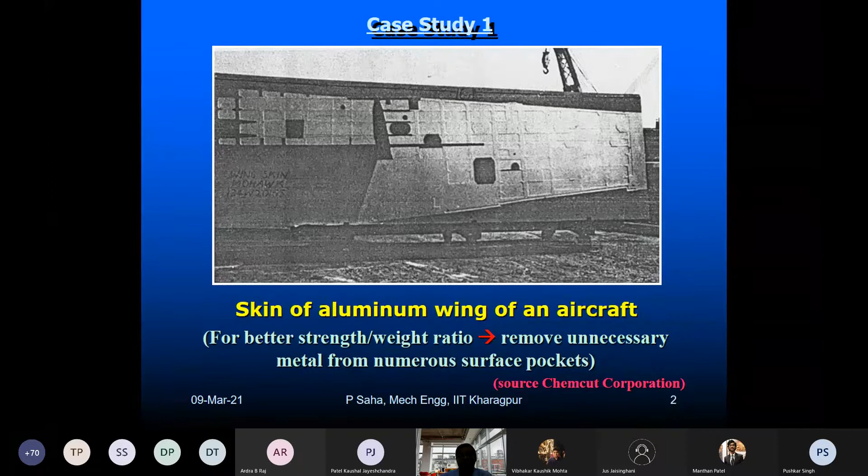And the first case is a very big, large job. You can think of a big aircraft wing, each one spanning up to several meters. Whereas in the second case, I'm focusing upon a much smaller object, and it is a thin object.

What is that material? This is basically an encoder disc. What is an encoder? It is actually fitted with a small motor, maybe a stepper motor or some other motor. So when the DC motor rotates, probably through a light sensing device, it can tell by how much angle it rotates, and the total number of times it has rotated. So if you have a counter, you can do those kinds of things.

So this encoder disc is very thin, only 25 micron thickness, and it is made of an alloy of copper and beryllium, not exactly copper. Copper is much more malleable, so this alloy gives slightly more stiffness to the copper.

Now on this encoder disk, what I need to do is make some small rectangular slits all along its periphery. On the circumference you see there are such slits, and these slits are of equal dimension, every slit, and they are equidistant with respect to each other. So if there are 200 such slits on the circumference, roughly every slit is around 1.8 degrees apart, 360 divided by 200.

The question is, how to machine and make such precise slits at regular intervals on such a thin disk? Again, machining is not even an option, and conventional blanking process will probably also be ruled out because of the size of the features and such close proximity between them. So I have to think of some other methods. These are just some examples, but let us see what could be the solution.

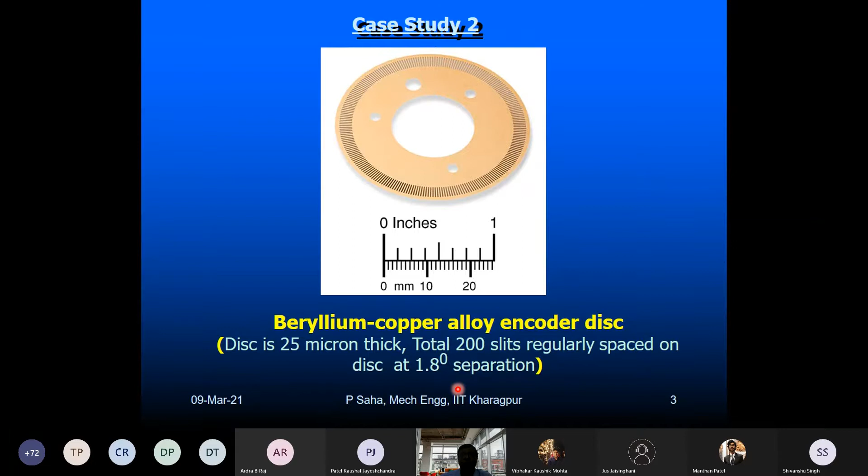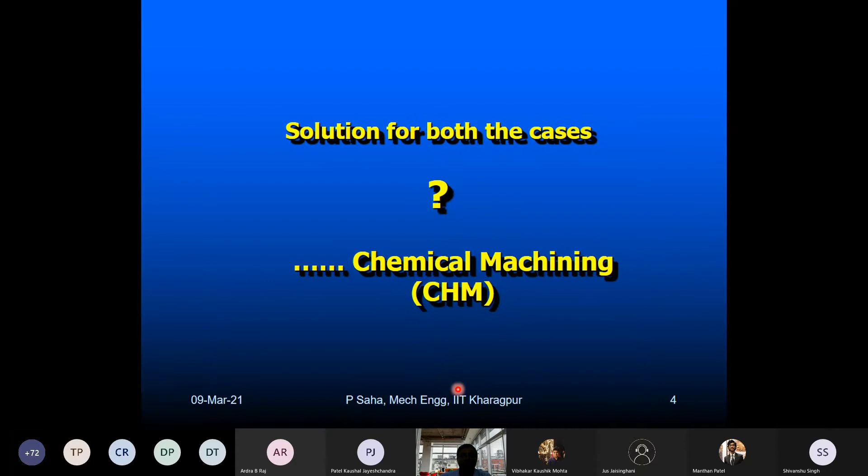The solution for both cases could be, I'm going to emphasize, our topic today is chemical machining. So chemical machining, we can have... just a minute.

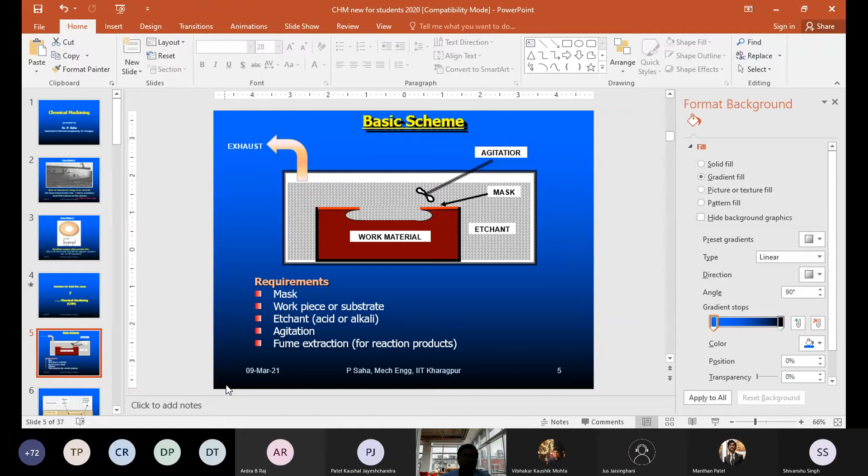This is the basic scheme of a chemical machining, but as per actual applications and requirements, this scheme may be different. It may not be exactly like this, but functionality-wise, the way machining happens remains the same. So what we have shown you is a container.

Which is filled up with some etchant. What is an etchant? Etchant is a reactive chemical. It could be an acid, an alkali, or some other salt, which has some corrosive properties.

So here we have submerged this work material, and you see out of this work material, some portions—initially it was a complete block—I want to machine out some portions. So this has been machined out with time. After some time you have shown it.

So what is responsible for the machining? It is the chemical reactions between the etchant and the work material. So obviously when the chemical reaction takes place, there will be some reaction products.

These reaction products could be either solid products, or sometimes soluble products, or sometimes gaseous products. But what is important to know is that with time at the interface, as the reaction goes, the concentration of the original etchant will keep on changing, so that locally available on the surface, the etchant may not be the same.

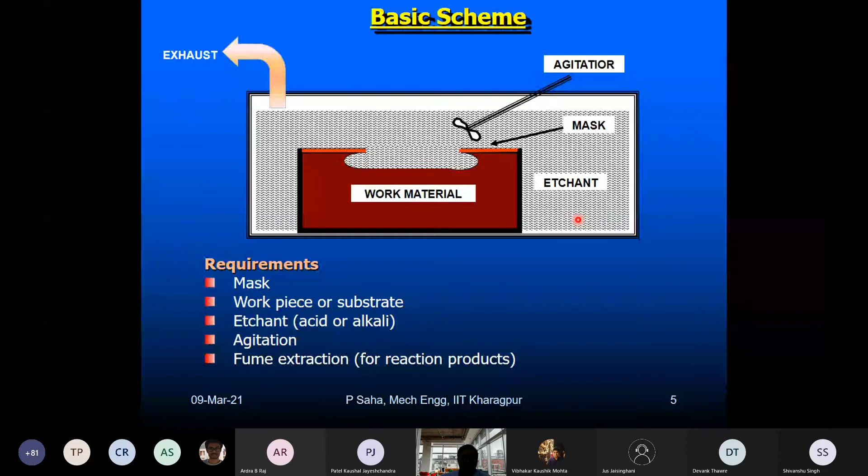So let us move forward. So here, what you see, the bottom is your job. So this light pink shade is the job.

And this whitish thing is basically the open atmosphere, or this is etchant. And the job is dipped under this etchant. And here, my reaction will happen in a very thin layer, which we can consider as a boundary layer.

A thin layer of this material. So within this, actually what will happen? From the etchant solution, the reagent will diffuse into the work surface.

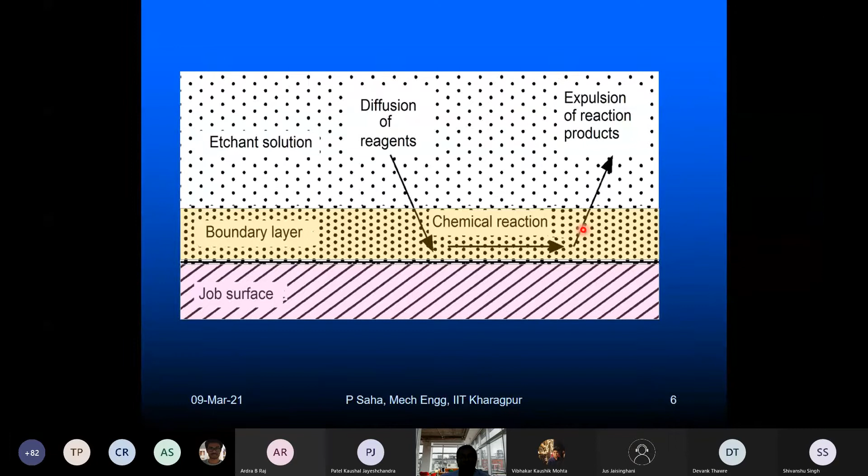They would react through the chemical reactions, and the reaction product will be generated, and they are desired to be expelled out from the workpiece. Otherwise, if the local concentration of the reaction products remains high, the reaction rate will go down. So we have to ensure their expulsion from the job and replace that with a fresh reagent.

Now I'm talking about the mask. When you cover the entire workpiece surface with mask, and if it strongly adheres to the surface and remains inert with the etchant, what will happen? Nothing will happen when you dip.

But we want to machine at specific areas of the job. So those portions we cut the mask, we strip the mask, so that etchant can come and react with these areas, so that these portions will be machined over time, and such depth will be attained.

But with time another thing may also happen. You see on the side we are getting a slightly tapered cut. Why? Because as more depth is entered, the etchant can react from the side. So even the extended portion of the mask, below the mask, some portion is always machined by side machining. So you don't get an exactly straight cut - some undercut will be there. This portion is called undercut.

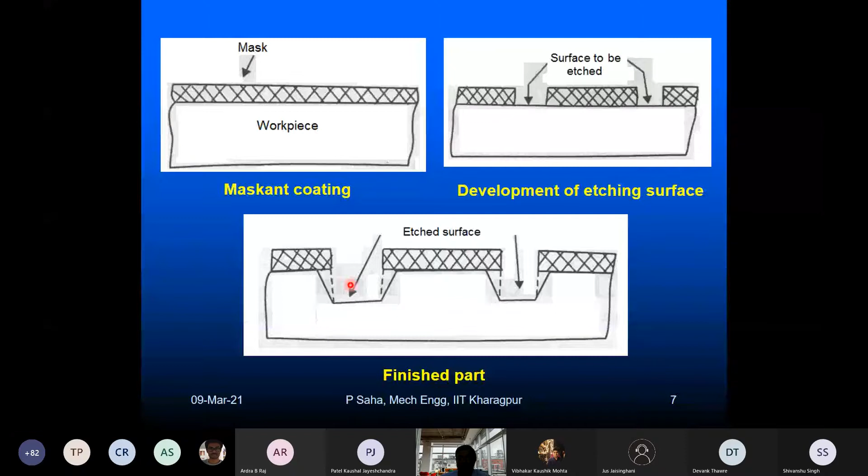Classification wise, chemical machining broadly can be classified into two things. One is called chemical milling operations, like aircraft tubing. Through chemical milling we are doing weight reduction, blind detailing - it is not a through machining process. Whereas for chemical blanking process, it is a through process, and some features we can go for through detailing - meaning both sides are open, so light can pierce through once you machine it.

Sometimes we also have what's known as chemical engraving. This is also a kind of milling process, but here the detailing is blind, only up to a very limited depth. I'll show you some figures later, giving examples and applications of the chemical engraving process.

And the last one, very much used in industry, particularly for various types of small components - electronic circuits, printed circuit boards and all - photochemical machining is also used. I'll try to discuss that as well.

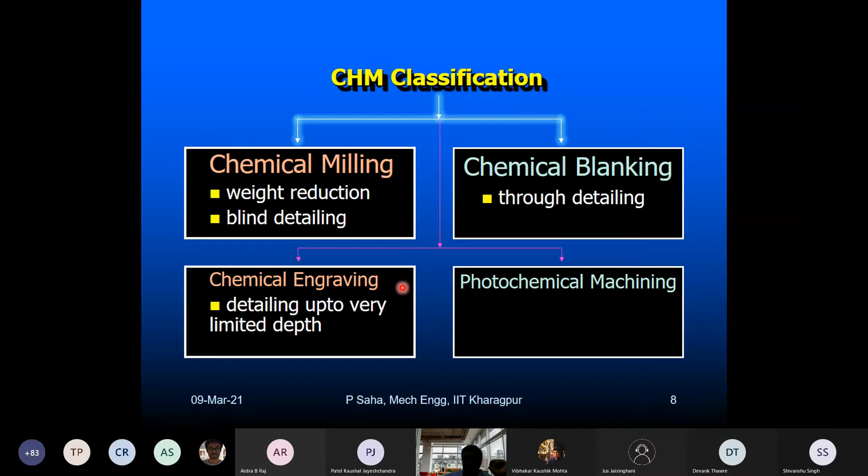So from these classifications, let us see - one of the primary requirements is the mask. I have to cover up with mask the portions which we do not want to machine. Depending upon the size of the job, the accuracy required, and the number of jobs to be produced - the batch size - there are different types of masks, and how quickly we can generate them.

One of them is a cut and peel type mask. This kind of mask is typically applied on relatively bigger size metallic jobs, using very thin sheets of rubber, similar to surgical gloves, made of vinyl rubber or neoprene rubber.

The mask material is first applied on the entire surface of the substrate. The substrate is much bigger, like think of the aircraft wing - such kind of cut and peel type will be applied there. This can be applied by brush, by flow, by dipping and taking out from the rubber solution, or by spraying. Typically the thickness will be between 0.03 to 0.13 millimeter - sub-millimeter.

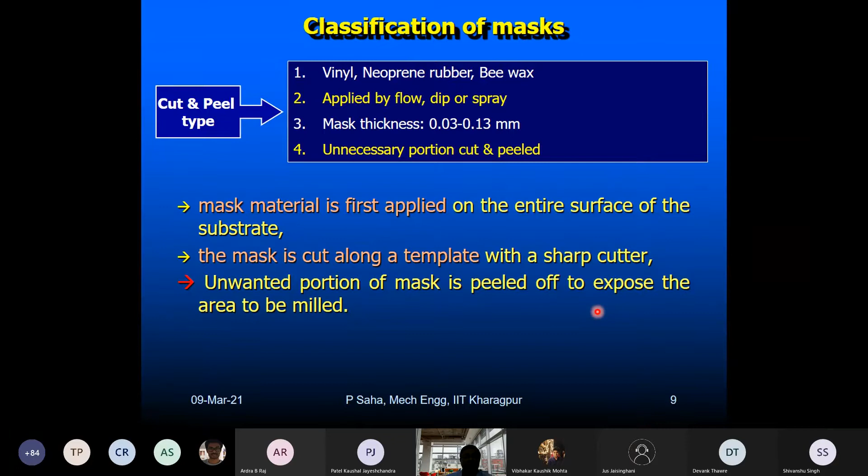Now the second type of mask is called screen print. Screen print is very much used in the printing industries, and we also use it for chemical machining. Here we have to use a mesh - a kind of net-like surface, like a silk cloth which is made of very fine silk.

Okay, but if you look microscopically, they are made of very fine fibers, fabrics, and there are a lot of perforations there. If you pour water through the silk, slowly the liquid will percolate down to the bottom, and if anything is there, it will be transferred onto this liquid.

We can also have a very fine mesh of stainless steel wires, which have much higher longevity. This will have a stencil placed upon the material upon which the material will be machined. With a figure I will try to explain: on the bottom you have a net, over which we have some kind of a stencil. Stencil means a solid sheet having some selective opening describing the image to be transferred, so a liquid can be transferred down onto the net. So this is what is called the stencil.

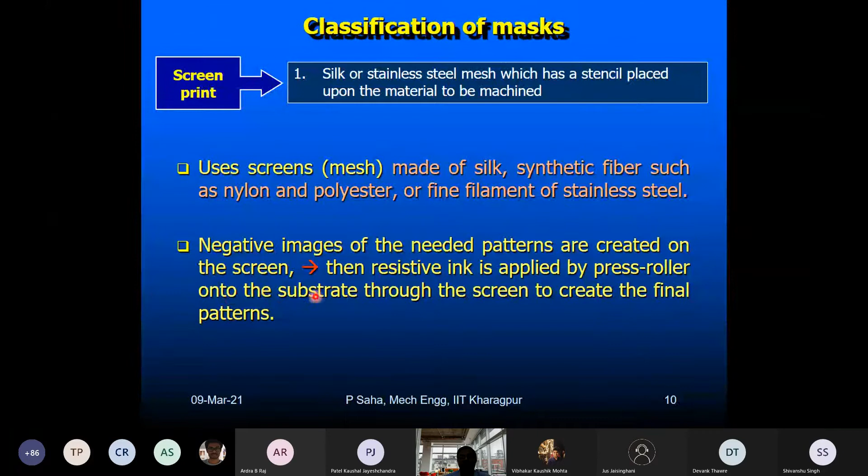So through the projection systems, the light image is made to fall on the screen, and by that time we have applied a resistive ink, by a squeegee or a pressed roller, onto the substrate, and through the screen we create the final patterns.

How is it done? Let us see like this. All of you might have seen an overhead projector - before PowerPoint, this overhead projector used to be used very much. For that, we have a transparent polymeric sheet known as an overhead projection sheet.

This sheet is transparent, thin, same A4 size, which can go through a laser printer, and something can be printed through the printer onto this transparent sheet. This can easily be made of a film also. Suppose we have some image in mind which has to be printed on this chart - so the film positive we create on the film.

Now below a projector this will be placed, and this image will be used to expose and harden the light sensitive emulsion. What is this light sensitive emulsion?

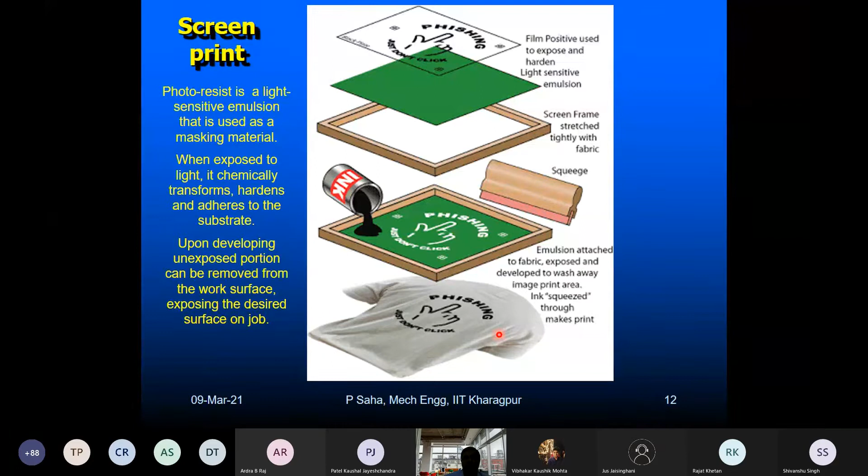The third type we have is the photoresist type. Photoresist is what I explained in the last slide. This will mostly be synthetic photoresist, and it will be applied by...

...a coating plate rotating at very high RPM, several thousand RPM. This device is known as a spin coater. On the spin coater, we hold the object through a vacuum gripping system. Here, through photographic projection techniques, we create the photoresist mask quite similar to the earlier one, and the mask thickness for this application is extremely thin, only a few microns, 2-3 microns.

It is not used for parts more than 1.25 millimeters thick and 1.5 meters long, and it can handle highly corrosive reagents. So the photoresist mask can create very fine, accurate, closely spaced features, reproduced in a very accurate manner. This thin resist pattern provides small chemical resistance to strong alkali and acid agents, so it is mostly used for surface applications with very small depth.

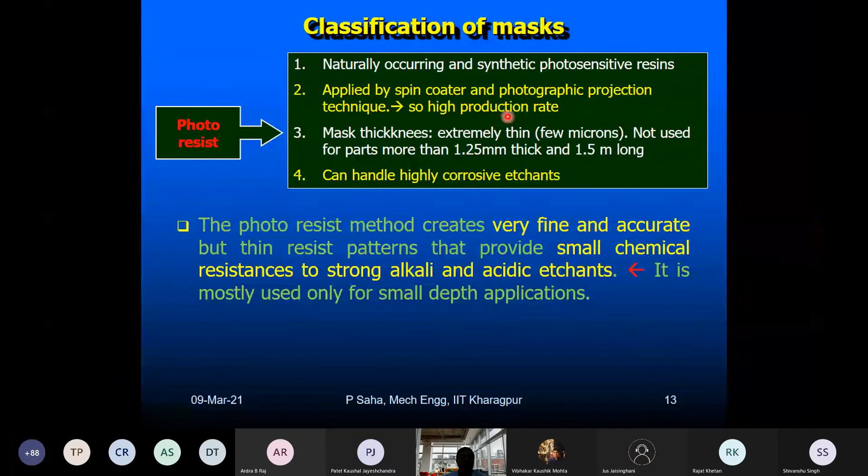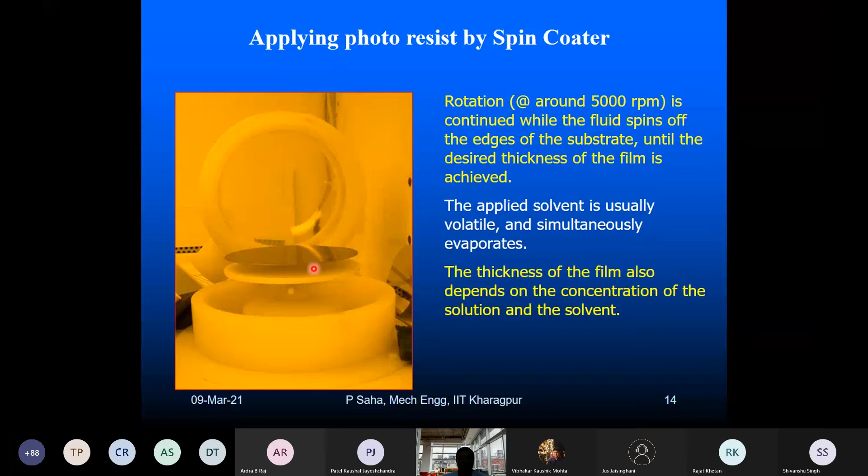Now this has to be exposed with some kind of photographic projection similar to the earlier method, so that any image, a positive image, can be transferred, and with the UV light projection systems the mask can be created by the chemical conversion of the photoresist at select locations.

I'll come to this later when I talk about the photochemical machining techniques, in more detail. Now, what will be the selection criteria of the mask, from common sense?

One thing is very sure: the chemical resistance of the mask is a primary issue, because the mask should be chemically inert to the etchant. If the mask also reacts, probably that will not serve any purpose. So deeper etching will be possible with a thicker mask.

Then part configurations - because when you talk of a spin coating thing, spin coating will probably be only for a flat job. But suppose we have some kind of a seesaw job, or some undulations, or some curved surfaces - there probably we cannot use a photoresist coating.

Then, in how many numbers do you want to produce the parts? So masking - because if you have to make large numbers, the mask making process also correspondingly has to be done at a much faster rate.

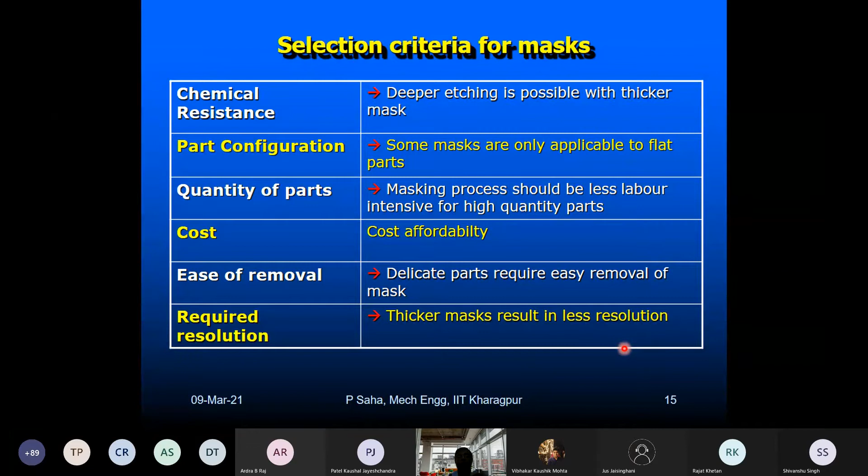And lastly, the required resolution - because the thicker the mask, from the opening down to the bottom up to a certain depth, the resolution will be lost. But whenever the mask is very thin, like the photoresist mask, you can have very fine features, very closely spaced features, because you can maintain resolution very high, and you are only going for a typically very surface level thing.

So application-wise, as I said, cut and peel type will be used for big structural parts, like milling of aircraft components, milling or blind machining of missiles, space components, and like that.

What about screen print? Screen print will be for mass production, because cut and peel type is for low volume production, as it requires a not-so-automated way.

Maybe you can use a CNC. If you have a CAD design, the moment you apply a mask, you can incorporate a CNC machine with a cutter. It can cut the path of the masking portions, and then manually you can peel them off. This is one way, but it is time consuming. Whereas screen printing is much faster, but it is less accurate compared to the photoresist technique.

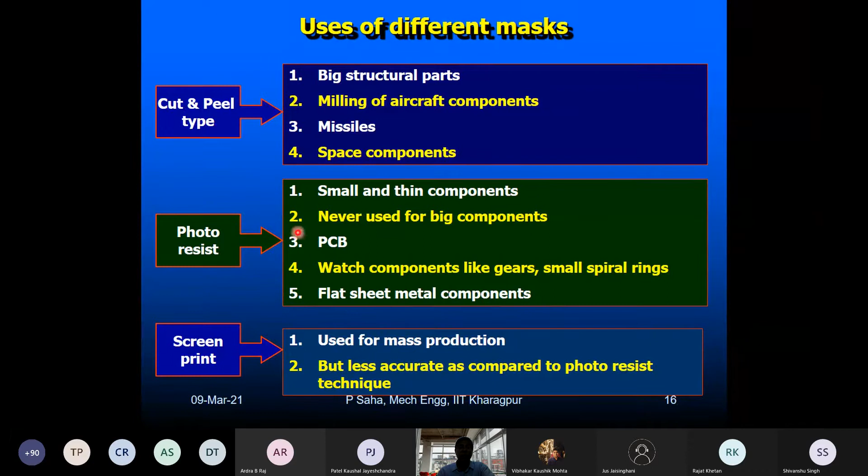So what about photoresist techniques? It will be used for small, thin components, but never for big components. Printed circuit boards can use it. Watch components, like small analog watch gears and micro gears, small spiral rings, these are manufactured by photochemical machining using photoresist. Flat sheet metal components can also be made using photoresist, typically for small jobs.

Now coming to the concept of undercut and etch factor. When you achieve a certain depth, say this red color is my depth of machining, and I want to machine up to a certain depth, this is the depth of cut. But because of side machining, as you penetrate with time, on the top portions there will be more machining, and down to the bottom the machining will be less, because the bottom portion is exposed for less time to the chemical. So we get a tapered surface.

So this is known as undercut. The mask is up to this point, but actual side machining on the top is up to this point - this is what is called undercut. And the etch factor is the ratio of the undercut divided by the depth of cut.

For different etchants, their characteristics are different. We can have a whole lot of etchants starting from ferric chloride, chromic acid, ferric nitrate, hydrofluoric acid, nitric acid, and so on. Sometimes we also use mixed acids, like HCl and HNO3 together. It all depends on your application and which metal you are working on.

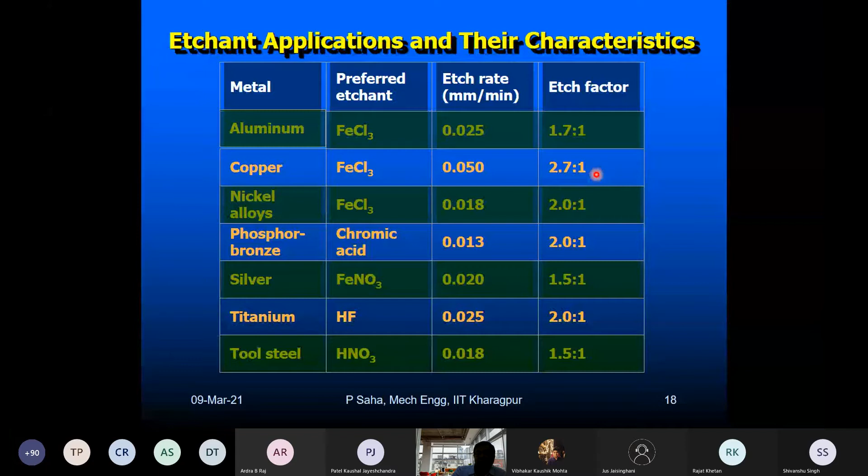So depending upon the etch factor, if you know the depth of etching, you can predict this extra dimension coming into the final machining, and restrict it by restricting the mask opening. Suppose the intended dimension is 10 millimeter, so you don't make the mask opening 10 millimeter already - you make the opening slightly less, because you know some additional dimension will be achieved through the side machining process.

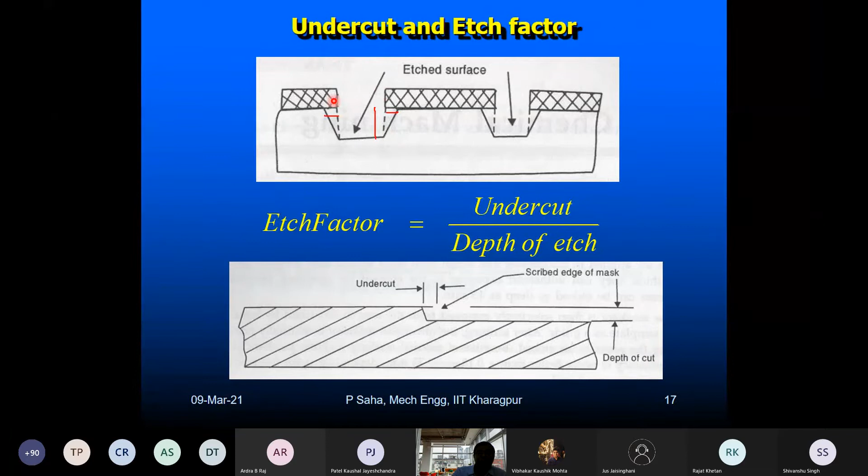So this undercut has to be taken care of during the mask opening process, so that once we achieve the depth, the undercut is known, and the corresponding mask opening dimension can be decided. So etchant selection will depend on surface finish, removal rate, material type, etch depth, type of resist, cost, and so many other things.

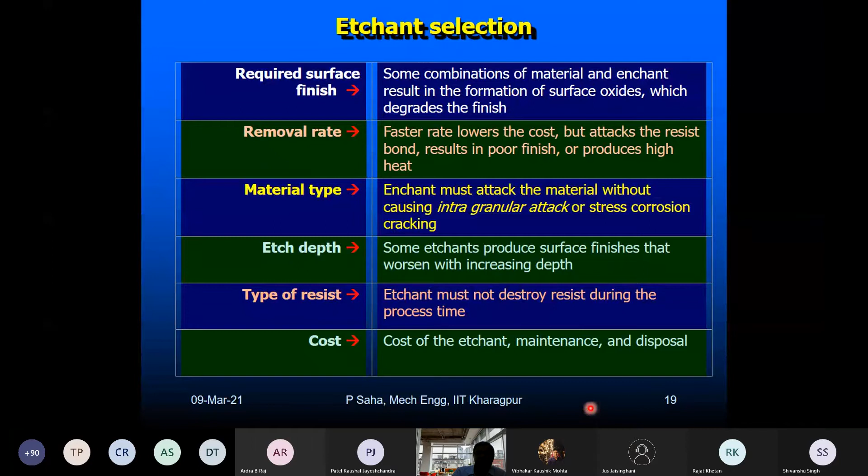Now, because of the undercut, if we try to attack the job from one side, what will happen? There will be undercut, there will be side machining, and we are going to get a tapered surface like this. But in order to avoid this, we can opt for double-sided etching.

This requires little prior knowledge of what the etch factor is, how the etchant is going to react, how much the slope will be, and so on. But whatever the case, sidewise straightness or zero taper can eventually be achieved.

If you sequentially go like this, you see how it is achieved. Say initially we have started like this. Now we have a double-sided mask, on the top and on the bottom, both submerged or exposed to the chemical. So the reaction happens at the same rate at both surfaces. Initially it goes vertically down, and gradually it starts attacking more and more from the side.

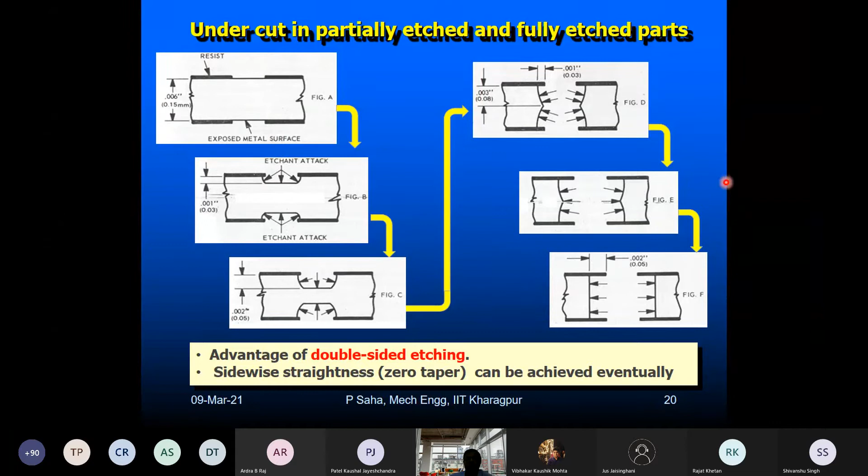The next process sequence is step etching. In step etching, we can make a stepped surface as well. How do we do that? We do not cover the entire portions of equal length at a time. Say initially, we are going to generate these steps. Initially we cover the entire portions, so we only achieve this much depth.

Later on we cover this plus these portions, only these regions, as well as these other portions. Initially all three together get machined up to this depth. Second time, we take some things out of the covered zone, so it's no longer covering these portions, only these and these are covered, so this as well as this gets machined. In the third step, both this and this are removed, only this remains covered, so this also starts machining, but by then others will have further machined.

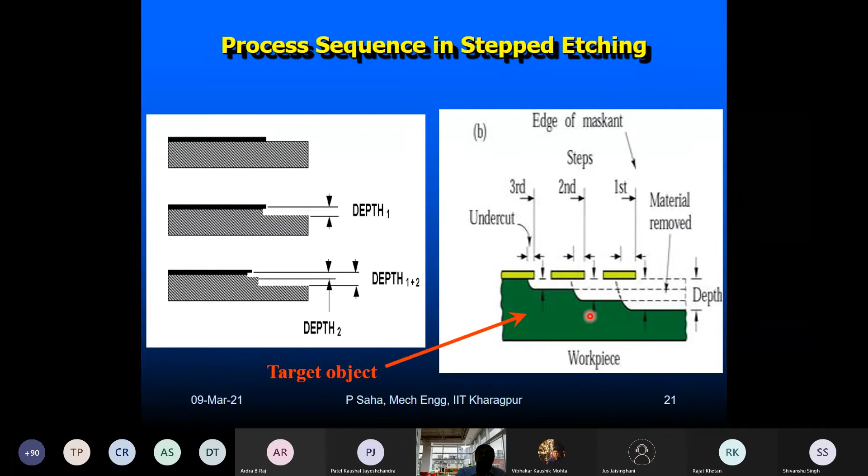But this process is very slow. Creating such a taper going up to a certain depth at the bottom may take several hours. It all depends on the reactivity of the etchant, but it is possible.

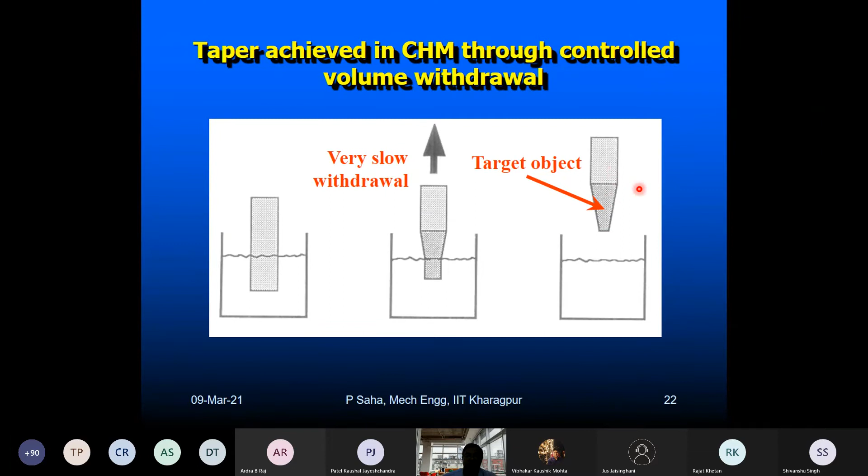The main advantage of chemical machining is that no conventional tools and dies are required. If you compare it with a normal stamping or blanking process, specific dies and tools are needed there. So chemical machining is basically a contactless process.

Second, we are capable of maintaining dimensional repeatability, knowing the etch factor, the depth of cut, and the machining rate. Repetitive jobs are possible, and there's design flexibility from prototype to mass production. We can make just one or two pieces, or thousands per hour. Both are possible with chemical machining, at low cost and with very simple technology.

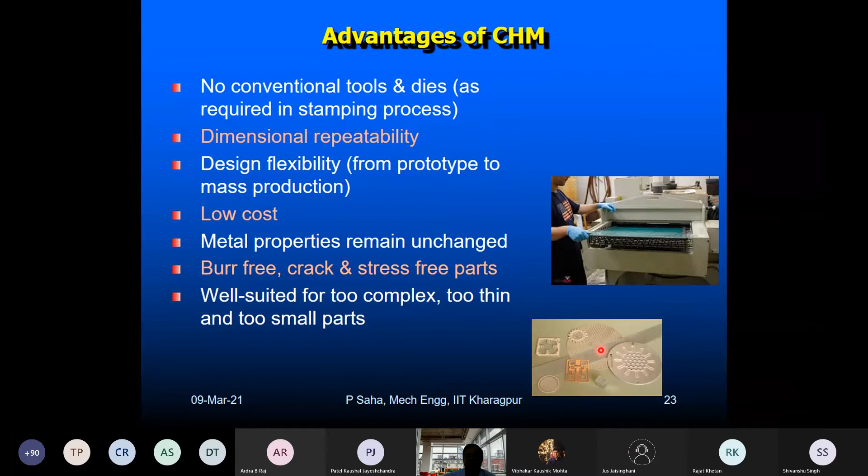Metal properties can remain unchanged, giving burr-free, crack-free, stress-free parts. This is sometimes required particularly for aerospace industries, and this process is well suited to thin parts, complex parts, and small parts. Some of the small parts you see are really suited for this kind of technique.

So for this class I will conclude with some applications. We have one or two minutes left. Before we conclude, let's look at this example: suppose this is a kind of dog bone or dumbbell shape.

Here I have to get this inner dark continuous line shape. The heavier ends can be formed by the forging process, but the problem is when you attempt to obtain such thin dimensions in forging, thin portions cannot survive - there may be cracks or failure. So it's best to restrict forging to a much higher dimension, up to this dotted line.

The central portion and all along, and the remaining portions, once forging is done, those are removed by the chemical route. Or take another example, this is a forming process.

When forming by a process, maybe through extrusion or some other method, these are some of the critical areas where wrinkles may form, and it may even fail. So how do we avoid this? The thinner it becomes, the more critical it is.

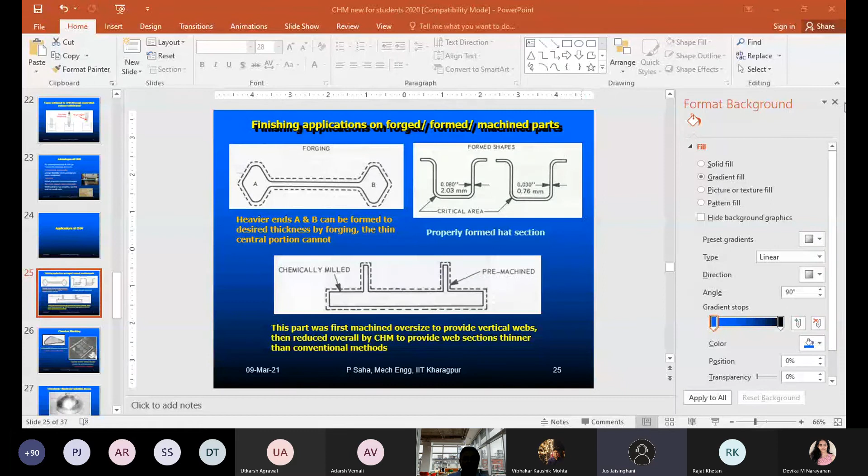See, for industrial cases when you want much more rugged things, in some of the earlier motors they used to have this kind of encoder. But now a lot of hard polymers like polycarbonate films and other composites are also available, and they are making encoders with that as well.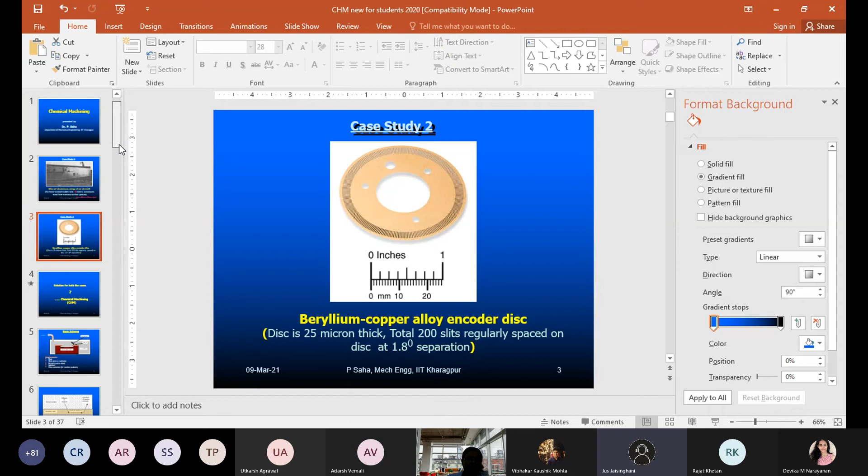Also, in the screen printing example, you mentioned you would explain with a diagram, but then we saw the next example was of photoresist itself. Is it photoresist or screen printing? Because the title says screen printing, but the first word itself is photoresist.

See, screen printing is the first technique I showed you, where you make the screen ready first, then repeatedly use the same screen. For screen printing you are not applying any mask on the target, whereas for cut and peel or photoresist, you are printing the mask on the job. Here, first you generate the screen using photoresist and light projection techniques, which is a photochemical conversion process of the photoresist, so your screen is ready. Now through this rubber squeegee, you can use it on any number of jobs to cover up the things and print the mask.

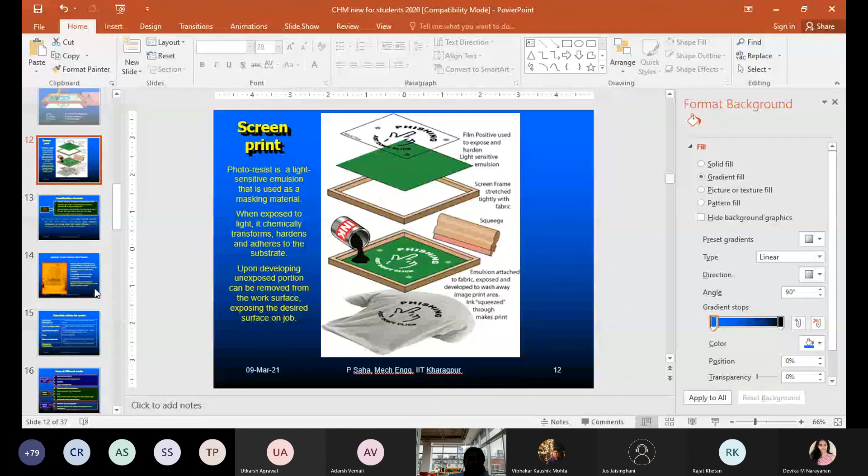My question was, there are three types: cut and peel, screen print, and photoresist. The main confusion is in the bottom two, which of them is this method, screen print or photoresist? Because in screen print, this method is mentioned for much bigger size jobs. Okay, and photoresist is also using a photoresist material, but it is for smaller, finer, closely spaced features.

When you talk about actual photochemical machining, through a demagnifying projection system, large features can be condensed to very small, closely spaced features, and those can be printed on the photoresist, generating a closely spaced mask. That will come in photochemical machining in the next class, I'll explain it more clearly there. Very good observation.

Please share the example. Your voice got interrupted again, could you please repeat?

Your voice is getting interrupted, could you please repeat? You are muted probably. Sir, I think someone removed him from the meeting. Yeah sir, I rejoined now. Someone is removing me from the meeting.

But I wanted to ask, there is a mention of silk or stainless steel mesh. So this example uses a silk mesh, but we can have stainless steel mesh also. Can you see the screen? Yeah sir, I can see the screen.

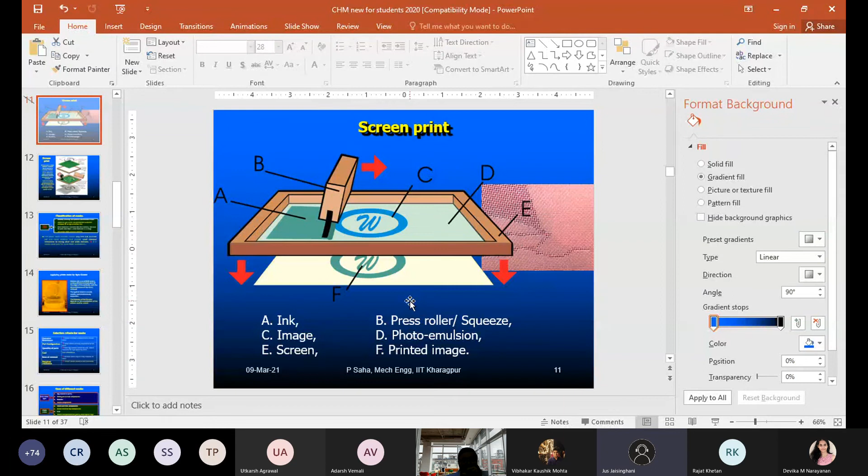Sir, and like the silicon chips or transistor manufacturing processes that are very prominent right now, do they use this chemical machining process of photoresist? See, this is just to tell you some of the things. The actual chip manufacturing process is much more complex.

In silicon chip manufacturing process, the features are even much more finer. There you are using different types of optical lithographic techniques, and some of them will be using laser lithographic techniques, then X-ray lithographic techniques. Because if you think of your current day processor, computer processor, you know what is the feature size between two circuits?

Maybe around 20 nanometers. Yeah, right now the transistors are around 7 nanometers, I think. 7 nanometers, AMD, much smaller.

So how to prepare? There are different techniques. These techniques will not do it alone. Different processes, then there could be multiple layer things. The same wafer will go through different process chambers. Sometimes it is baking, sometimes it is diffusion, sometimes it is deposition through chemical vapor deposition techniques - multi-process techniques. It's a very complex process.

One single chip manufacturing facility will draw investment of Indian rupees minimum around 5 to 10,000 crores. So essentially it will use some of these methods, but it will also incorporate multiple other techniques. What I showed is only the tip of the iceberg. Just to give you an idea, because all the details - that itself is a separate subject.